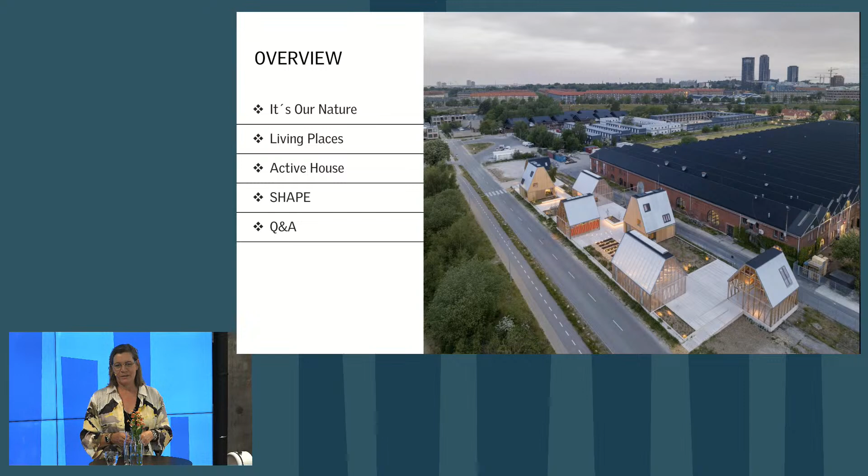The reason for us being three is that I may have studied a postgraduate master's, I may be an architect, but I still don't have a real scientific degree. So I think it would be a bit fake to call it a science talk with me only. The real scientists are Seda and Nicole, who are doing a Ph.D. and respectively a postdoc on these aspects of sustainable buildings, which is incredibly important.

So very briefly on Velux Group and our sustainability strategy, which is from 2020, called It's Our Nature. It actually founds back to 1965, when our founder, Villum Kann Rasmussen, formulated this purpose for the Velux Group, which covers the social, environmental, and economical aspects. Back to 1965 - had we written it today, I don't think we would have changed it. Maybe we would have written 'sustainable' into the wording.

This is our guiding purpose as a group in the building industry. Also, as you know better than any, our world needs it. We have to take action in this decade. This is the decade of action.

So the way we have approached it is on 3 levels: securing a responsible business with 9 targets, innovating products - obviously that's what we deliver, produce and sell, that is expected from us - and then the pioneer targets. And that's what's important today.

The 3 pioneer targets are: one is the historical footprint of the company, then it is the footprint of the products, halving over 10 years. And then what I'm going to talk about today is showing how to build sustainably, because it's not just about the company, it's not just about the products, but it is, so to say, the scope 3 - what do we do with the buildings where our products fit in?

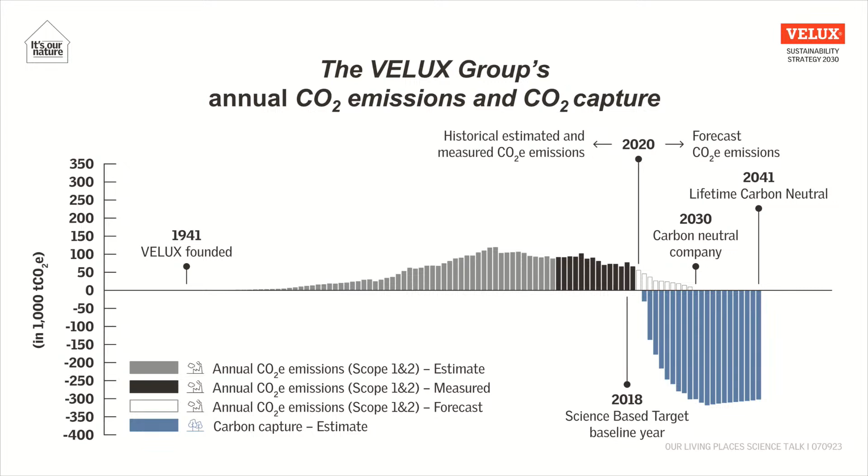And there's a lot of interesting talk we could have around that. I would just like to emphasize that in our perspective, it's not only about what we do from now on onwards, it's also about what we have done in the past. We cannot ignore who we have been in the past. And this is our focus here.

Then there is the carbon footprint of the products that we produce, and that is by far the biggest part of the CO2 in scope 3. Talking about scope 3, this is scope 1 and 2, these are 6%. So 94% is not in a Velux factory or something that we can decide over, because it's about steel and glass, aluminium, and that is some heavy stuff that we then have to work in partnership with our suppliers on.

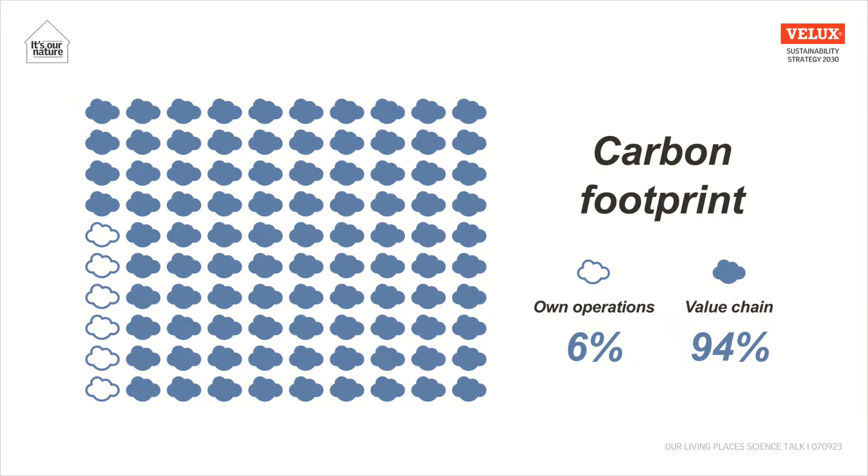And this is by far the biggest task, I think we can say that for sure. It's giving us some headaches, but we are on a good path. We can't say that we're there yet, but we're on a good path for 2030.

The buildings show how to build sustainably. We have actually been working with demonstration buildings for 20 years, more than 20 years, doing renovation and new builds - more than 30 projects in over 22 countries.

So what I'm presenting today stands on the shoulders of what we have done in the past, and that is what the company has done - many good colleagues, architects, engineers, other colleagues who have worked to push the agenda for sustainable buildings. And why is that important?

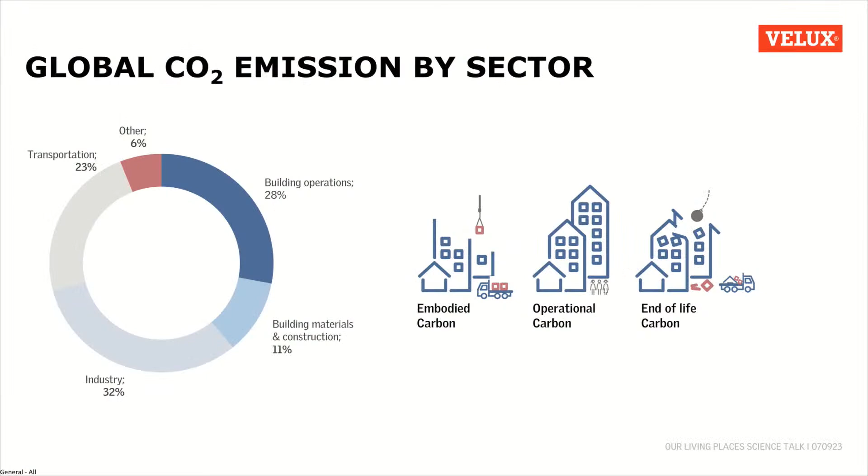Well, I think you all know that CO2 emissions in this sector account for more than one-third of energy consumption and CO2. So what is it we do? Well, we might first of all take on the lead. That's one thing. The second is you can play a role as a catalyst for impact and for change, and that is the role we're trying to take. We can't do it alone, but we can get the idea started.

And that's what we decided four years ago, when we decided to look at this framework, because it's important to say it's not just about the buildings. We cannot only talk about the four walls. We have to talk about urban development, and what is it we leave behind, or what is it we shouldn't leave behind.

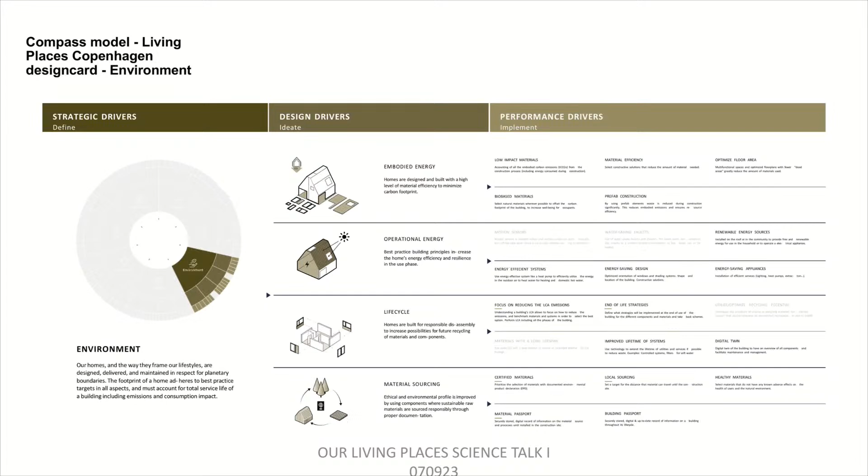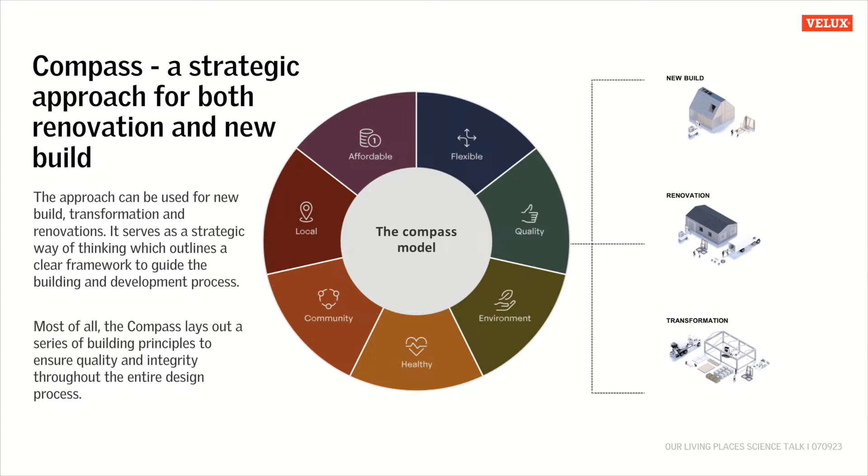So to do that, we have to look at it from a framework perspective. I won't go into depth, just to mention that we've worked with this in a framework we call a compass, which is able to score different parameters - I think it's a very known perspective. Because if we can't measure it, we can't manage it. We've worked with all kinds of typologies and aspects throughout health and energy. That's what we call the compass model, which can be applied for new build, renovation, and transformation.

And that's actually a continuation of our work since 2011 with Active House, which is our approach. We can discuss certification systems and all these good initiatives, but we have a fundamental conviction that you have to evaluate buildings by their environmental footprint, their energy consumption, but above all, the impact it has on humans. I can see Søren from Climate in the room, not surprisingly nodding.

This is what matters to us as people, because if buildings are not built for people, then what does it matter? When I explain it to lay people, it's very simple: it's your eyes, your skin, your lungs, your ears. Does that matter in the buildings we're in? Yes, it does, and we can quantify it - that's what we've done with this radar. Nicole will come back to how we've quantified that.

So this is the initiative - we call it Build for Life, and it's the whole life perspective, the life cycle analysis that we have to look at. We're doing a lighthouse project in Østbirk in Jutland, which is a transformation of old wooden barns into an innovation house, and they're already doing the construction. Worth a presentation on its own.

Today I'll talk to you about living places, how we've concretized this concept for homes. This basically supports the purpose we have today. I showed you the one with our founder, the pipe, but today it's what we see ourselves in: we create well-being for people and planet, transforming spaces, using daylight and fresh air. That's what we're able to provide.

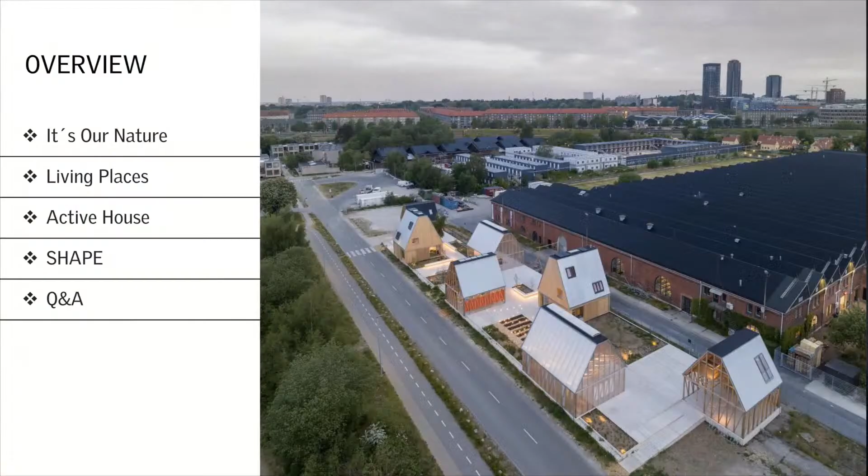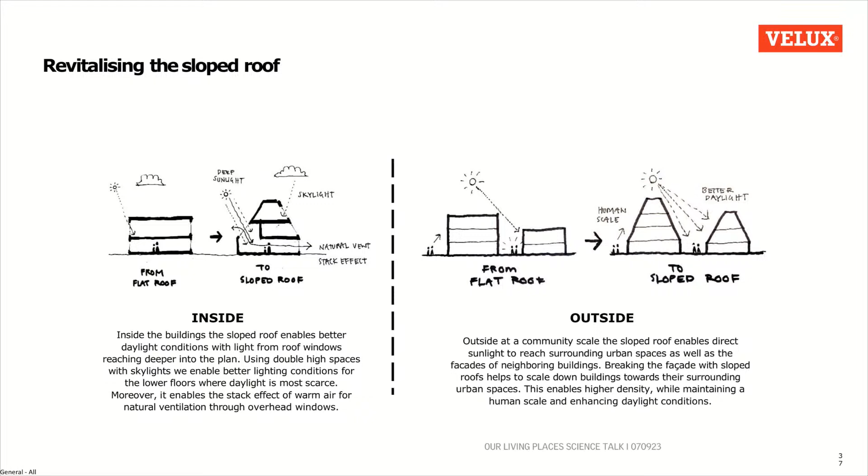And that brings me to talking about living places, which also takes its starting point with the sloped roof, which has, we think, advantages both from the outside and from inside. We think it would be nice to bring some sloped roof back into housing - maybe it doesn't all have to look like the same square shape, the tendency today.

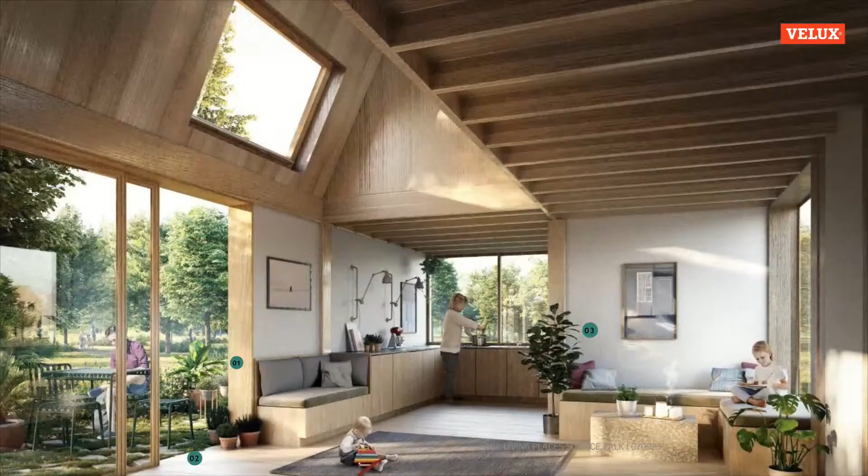We developed this together with EFFEKT Architects and MOE, now Artelia engineers, in a very close partnership - important to underline. That's basically our nature, and this is one of the first visuals before we built it, trying to take the outside in, trying to make a more open envelope and to be more in contact with the outdoors.

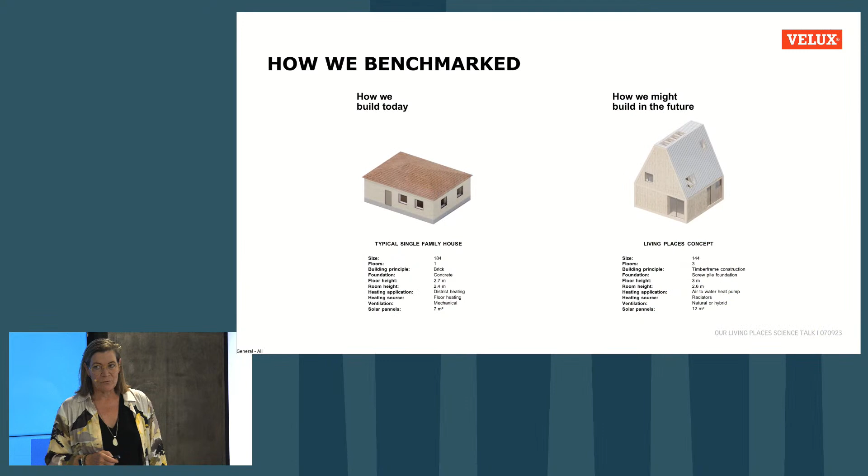Yes, and then we did one thing more: we benchmarked it towards what is a typical Danish single-family house. Because in our work with demonstration buildings, my colleagues and I have often experienced coming to other colleagues who are not building professionals and saying, we've made this fantastic home, look at the performance, hear about the U-value and transmission factors, and they're like, huh? What does that mean? I can't relate to it. We have to make it more tactile. So we took the standard Danish single-family house that Artelia has data on, and kept asking, what do we do that is different?

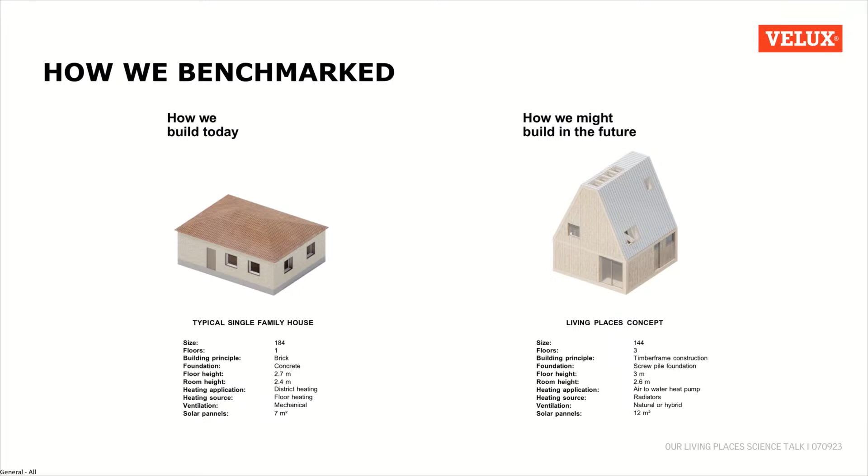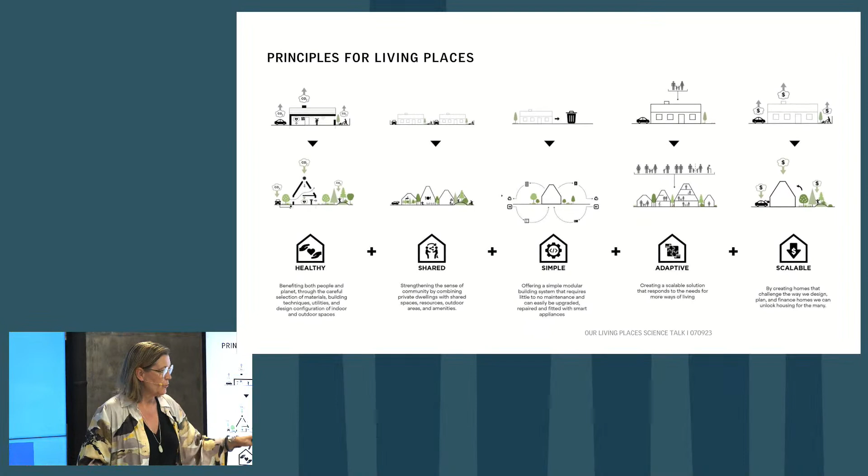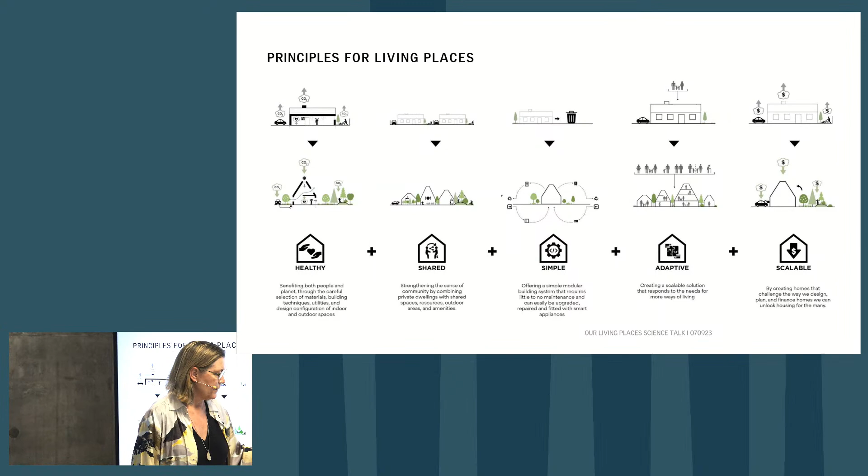You can go through the data on the one and the other, but I'd like to come to the principles, because that is the carrying base in the concept: we take all these principles into consideration when we try to build more healthy for people and planet, to share more, to not have all the same functions in one house, to make it simpler, because we keep complexifying buildings, to make it adaptive to fit different life patterns, and above all to scale it. This is a key principle, because you can always build something nice once, maybe twice, but we would like to scale and influence the entire housing building industry.

That's also why we build new build, because we know transformation is the biggest challenge, but new build is what shapes the legislation, the trends, and the first movers and pioneers. Those are the ones we would like to work with and reach.

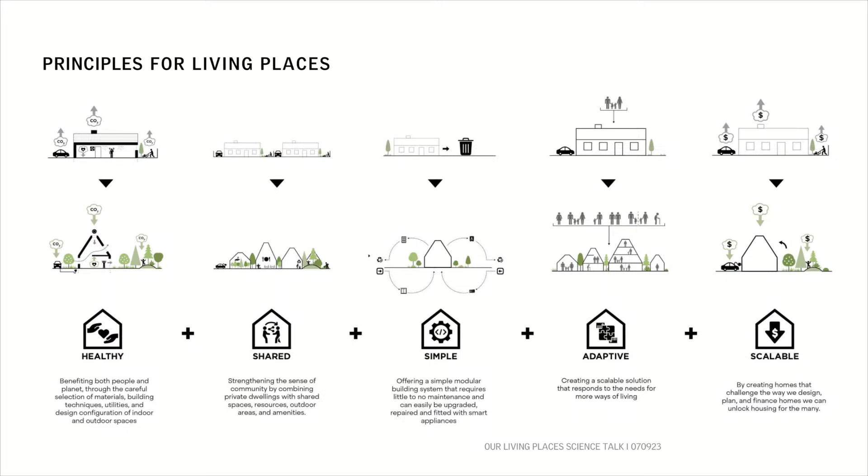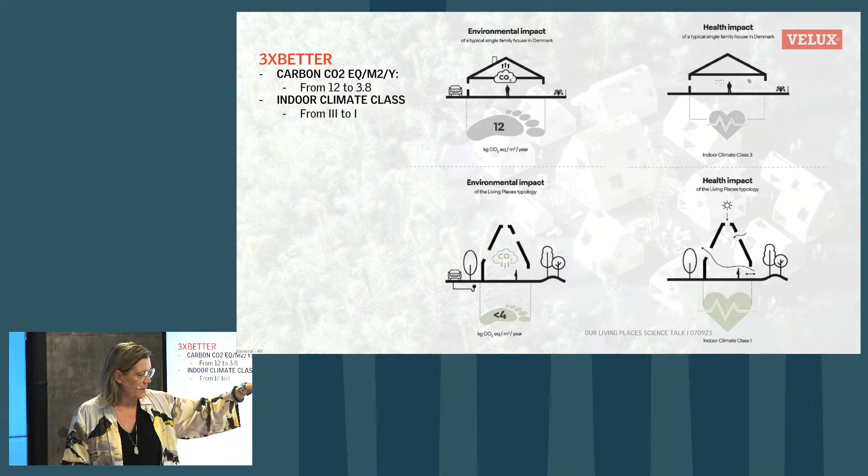I will only go into the healthy part. This is where we have managed to go from the legislation benchmark house of 12, from before we had decimals, to now verified at 3.8. So that is 3 times better, and the indoor climate is 3 times better.

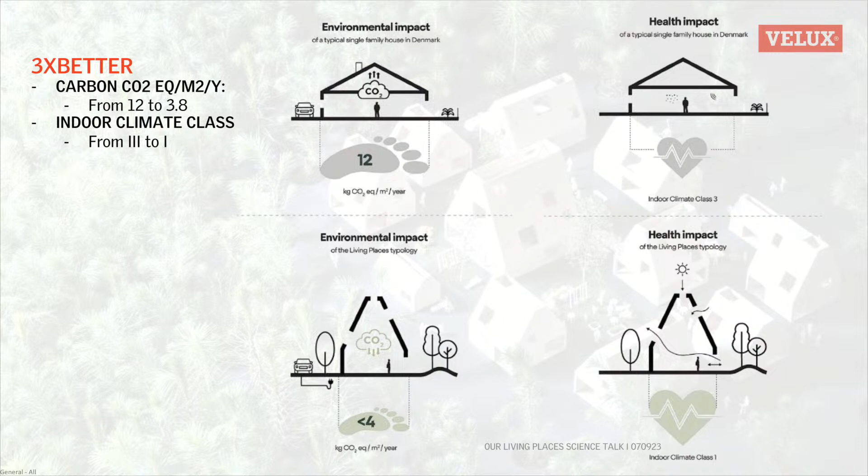Why is that so bad in a single family house? The climate experts in the room have a lot of data on that. The basic thing is that the secondary rooms, which are actually the primary rooms - the kids' room and the bedroom - are not regarded when it comes to indoor climate. It's always the nice big rooms with the facade and panorama windows, but the secondary rooms are where we spend the most time. So that is the most decisive for how good we feel the next day, our ability to learn, perform, and so on.

These slides are mainly for information, but this is the benchmark house put on the life cycle, the full life cycle approach, which now corresponds to the Danish legislation from 1st of January 2023.

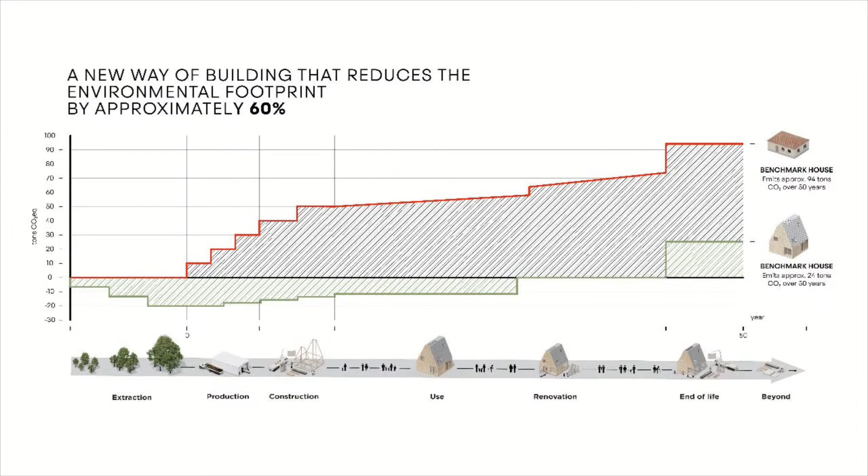This is our verification, which is important. It's not just something we say or our engineers say - it is actually verified by a third party.

This is how we try to explain life cycle analysis to our visitors and target groups, because life cycle analysis is something very complicated. I'm fully aware there are a lot of decimals, and there has to be. But on the other hand, the weather forecast is also very complicated, with a lot of algorithms I don't understand, but I can still read a weather forecast.

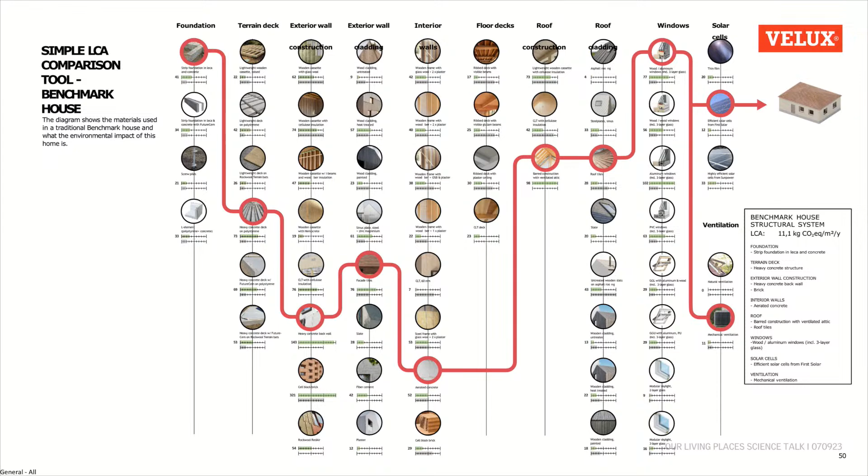And the same with life cycle analysis - you can go and look at the different shelves where you pick the stuff to build your homes. If you're renovating your house on the weekend, there will be shelves in the DIY store where you can pick these elements to build from. What will decide the CO2 footprint? It is what you take off the shelf. This is what they took off the shelf when building the benchmark house - this is what they chose, saying we like to build with these types of materials.

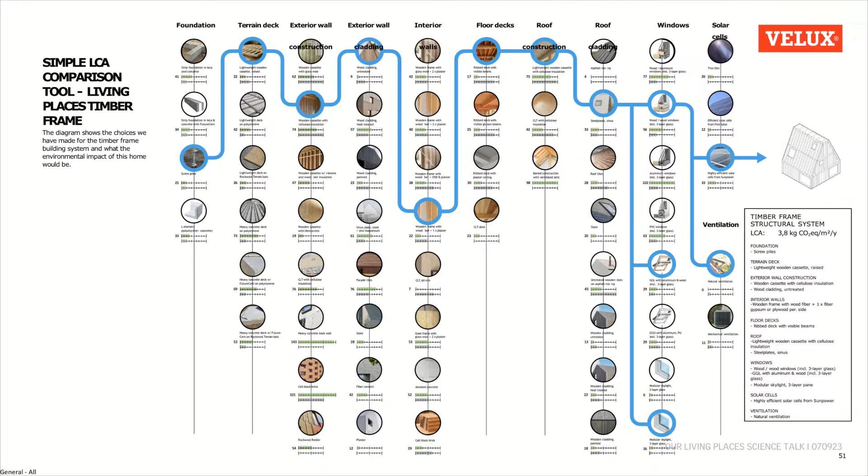And this is what we use to build the timber frame home. So the difference is from 11.1 to 3.8. It's simply a matter of taking it down from the shelf, looking at it just like you do when you buy food, then assessing quality and price and so on.

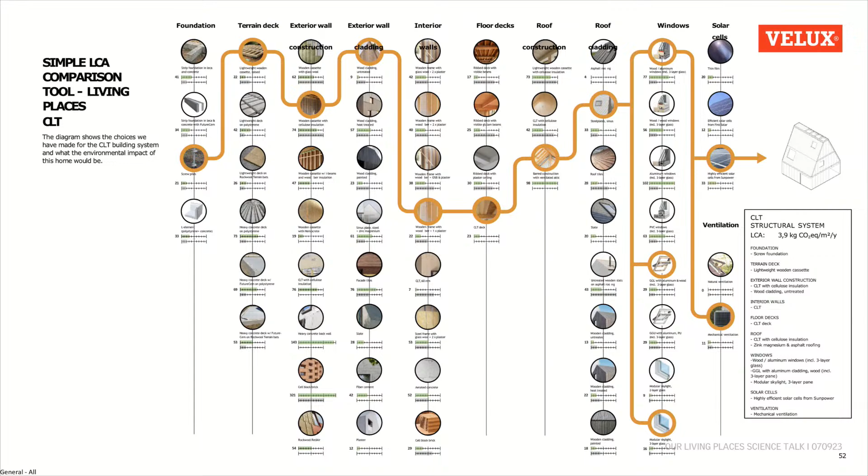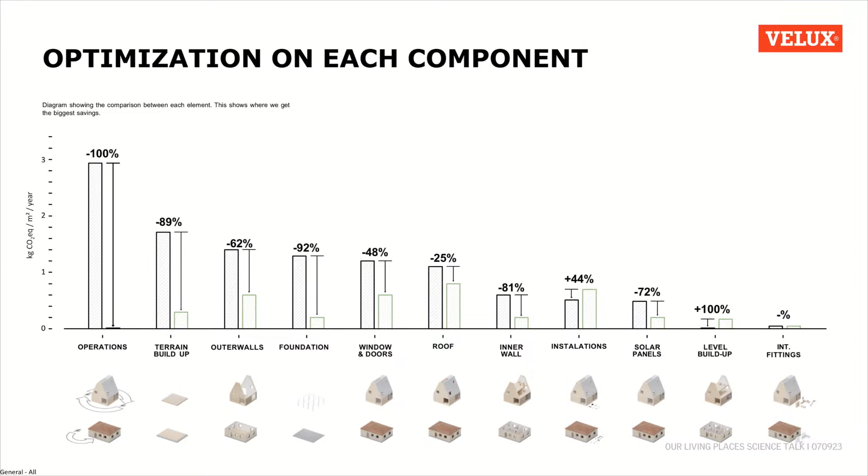And this is the CLT. We have made two structures so we don't have to discuss the structure, because that's not material to debate - exactly which structure. And for the nerds, or even semi-nerds like myself, these are the facts. They are incomplete, obviously, but we have done all the calculations as if they were complete, and more. These are the main savings.

What is different? Same again. And these are the preconditions for those who would really like to know what's inside.

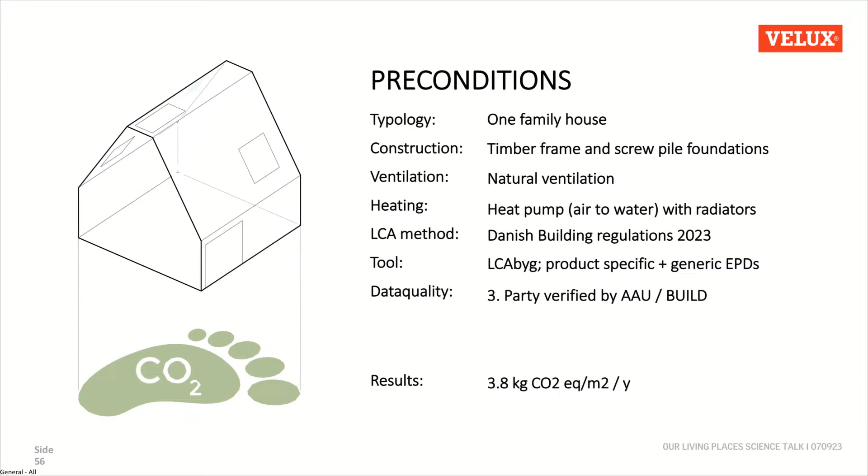The people part, the senses, is just as important, because of course we could build a nice home with no windows - we would never do that for good reasons. But we also think nobody should be deprived of access to daylight and fresh air.

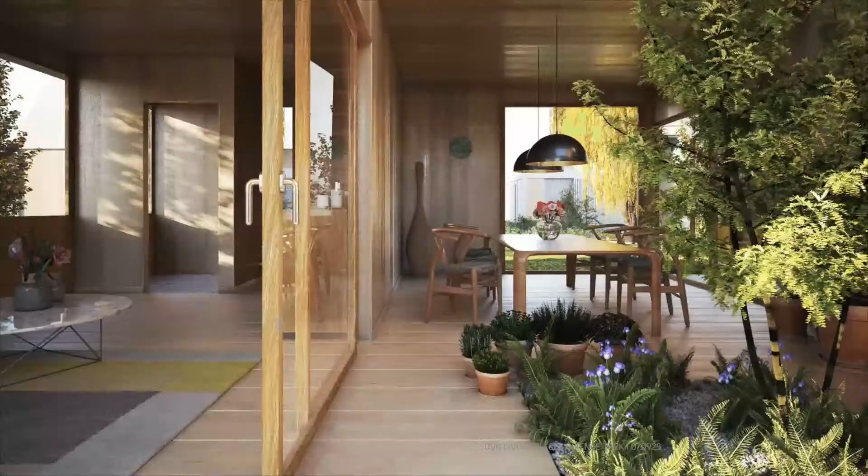So this is the approach, and we are here because of the UIA 2023, and we are partners for that, and we chose Copenhagen as the launch platform because of the Copenhagen capital.

So this is why we have built it as a living lab, in order to showcase it, because once you can build it, you can discuss it better and learn from it. That is the purpose of it.

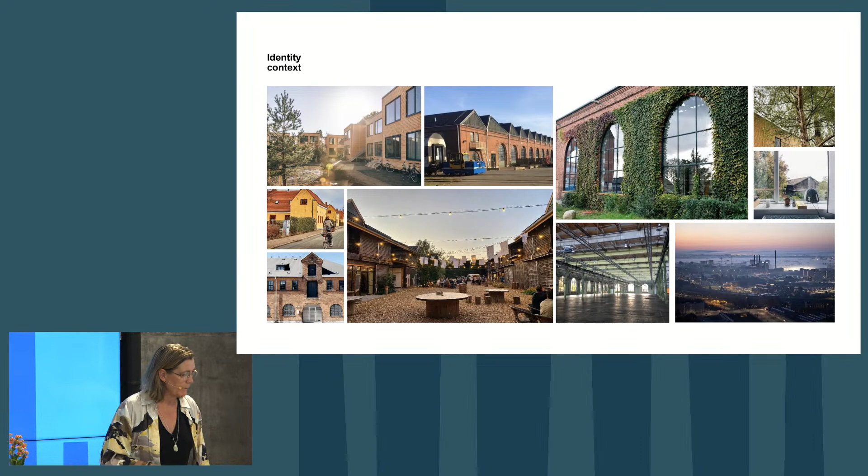And we chose Jernbanebyen, the old freight train area in Copenhagen, which has some very interesting student housing, some quite nice old buildings, and is fairly central in Copenhagen.

It's placed out here next to the tracks and between some main roads, but still 3 kilometers from the main station. We've built it up as a village because we can no longer only talk about the 4 walls. It's so important you also remember Corona. You all of a sudden realize very much where are you living, what is immediately outside, who are your neighbors, do you even know them, do you know their name, could you go and help them, or vice versa. So this notion of community was very important.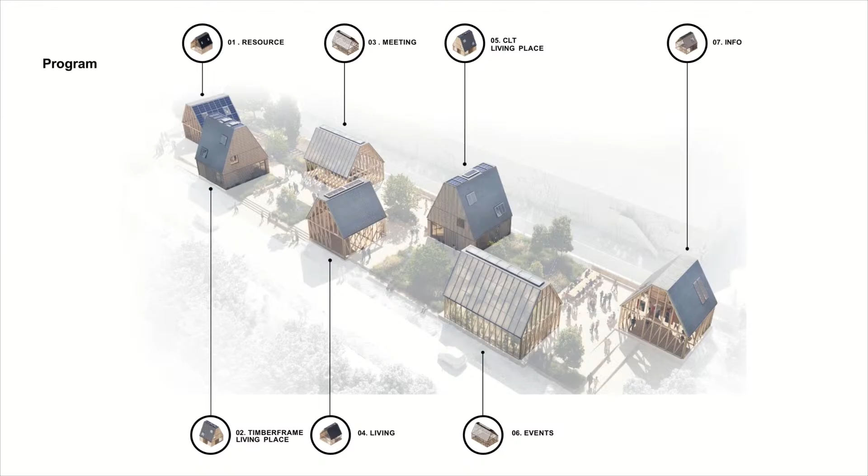That's why we built it up as a village, and we built 2 single-family homes. One is the CLT, and the other is the timber frame. And then we have exhibitions and events. This is from the visualization to the finished result. We opened in April.

Now the greens are growing. I've actually just been there, and we have a vegetable garden also. That's also a very important part of where you live, which is self-sufficient by 80 square meters, done by Fælleshaven.

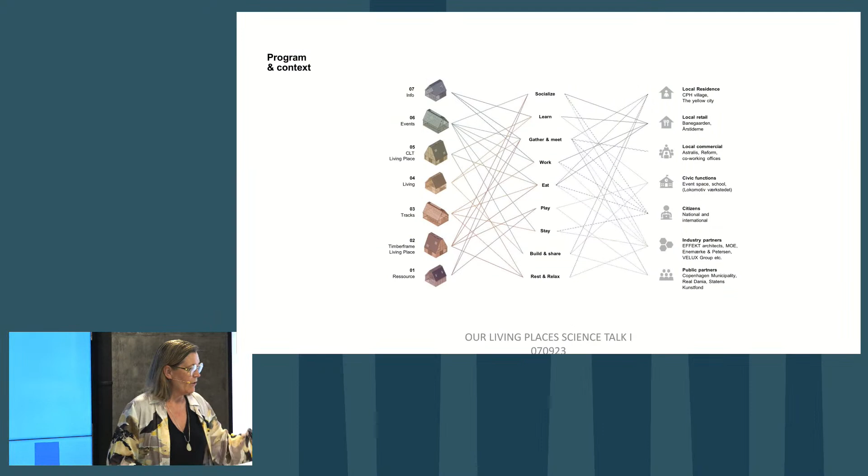We have a lot of interactions with the different functions in the pavilions, and then with a lot of professionals like yourself coming there, having a look and discussing. We have welcomed more than 5,000 people since we opened over 2 months, and still more coming, and we have actually decided to let it stay until September 24, because lots of people would still like to come and see it.

And coming back to the compass, before I hand over to Nicole, this is how we score it, but it's also about the one planet, and what is it that we are not leaving behind. So we took a motive from the planet, finding stones. Margrethe Odgaard has done this, finding stones and pigments from the planet that has guided us to the colors of the interior system.

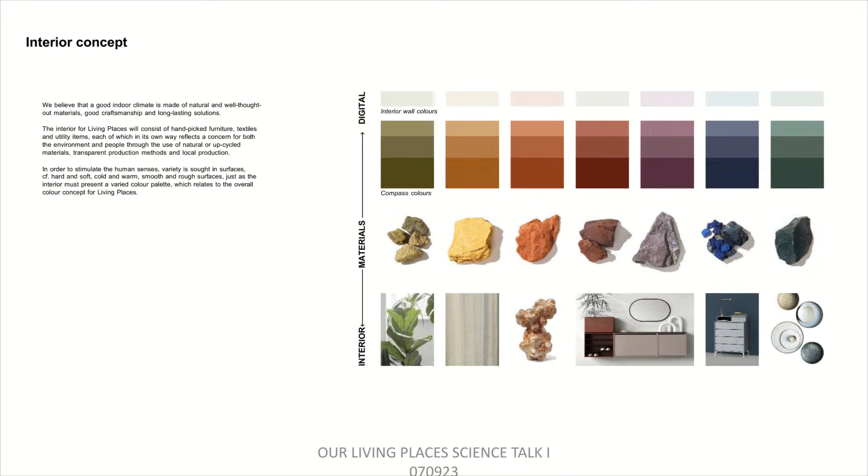And these are the stones giving this color scheme, and that is what you will see. If you have not yet seen, please stop by and look at the houses, because this is what matters most, is if you feel connected. It's difficult to express what it is, but it's that feeling of being home, identity, belonging, feeling safe and secure. It's not about necessarily a 213 square meter home. It's not about the bricks. That's not what you're looking forward to when you're coming home.

So just a brief look inside. We have made a virtual tour, and actually next week we will be releasing a film, which is a documentary that is also showing you the homes in greater detail. But still, I encourage you to stop by and come and have a look. I think the next open house is the 18th of September, but we have a website, and there's a link where you can come in and have a look.

Here I'm showing the CLT, so the solid wood house, so to say, and then compared to the timber frame house, where you come up on the first floor, and you have the 2 rooms, identical. They have a bit of different orientations, and a bit of different fenestration. And then you go upstairs, up the nice wooden staircase, and you come up to what I like to say is the best room, the bedroom, which is the top floor.

So it's a 147 square meter home, but we have also developed it as a row house, where the CO2 footprint can be as low as 2.9. So we're getting close to the 2.5, which is the one planet where we leave nothing behind or don't use too much.

And this is our partners, proud partners, without whom we could never have done it, and we're doing it in great cooperation. So, yes, happy to pass over to Nicole to explain a bit more about the Active House parameters, to go more in depth with that, because she is the mastermind behind that.

Over to you, Nicole. Okay. Hi to everyone. Thank you, Lone, for presenting me.

As has been said before, I'm a third-year PhD candidate at Politecnico di Milano, working on a thesis supervised by Professor Marco Imperadori and co-supervised by Lone Feifer, titled Fsense, Phygital and Cognitive Paradigm for Active Housing Use Rating, estimating via IoT devices the effect on comfort during building operation in a multi-purpose and BIM-based framework. The paradigm consists of 5 points toward achieving the sustainable management of cognitive buildings, to fill the gap between predicted and actual performances by determining and validating them with the multi-criteria evaluation method of the Active House Rating Scheme, to enhance the comprehension of performances and communication between stakeholders, to recalibrate strategies for increasing comfort during building operation, promoting sustainable practices and use of buildings, and digitalizing the built environment toward EU objectives.

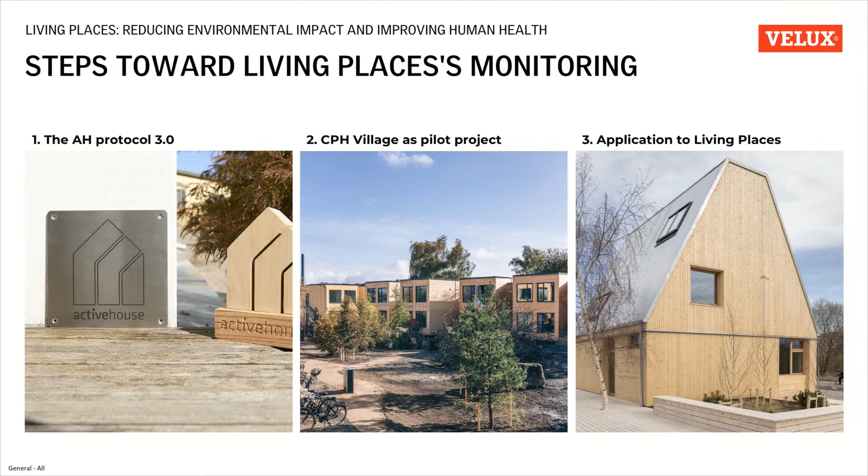Before describing the monitoring of living places, the path includes the Active House Protocol 3.0 description that has been already shown a few minutes ago in the slide by Lone, and the CPH Village pilot project, which supported the validation of the monitoring strategies applied to the living place building.

The Active House rating scheme is recognized internationally as a sustainable building certification, based on three main principles: comfort, energy, and environment. It focuses on 9 criteria: 4 for comfort, 3 for energy, and 2 for environment. To certify an Active House, the building should achieve an average score across all 9 criteria equal to or less than 2.5 for new construction, while for renovation or existing buildings the score should average at least 3.5.

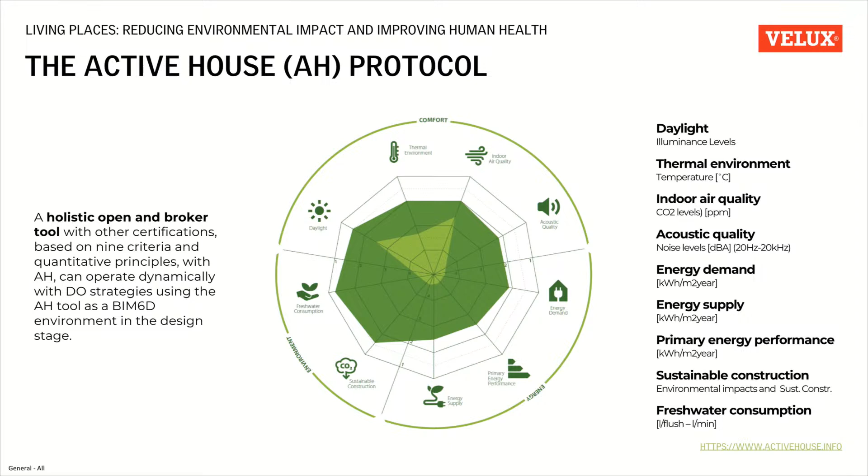What we can say about Active House is that its holistic approach allows for a multi-criteria evaluation to create healthier and more comfortable buildings for occupants without negatively impacting the climate.

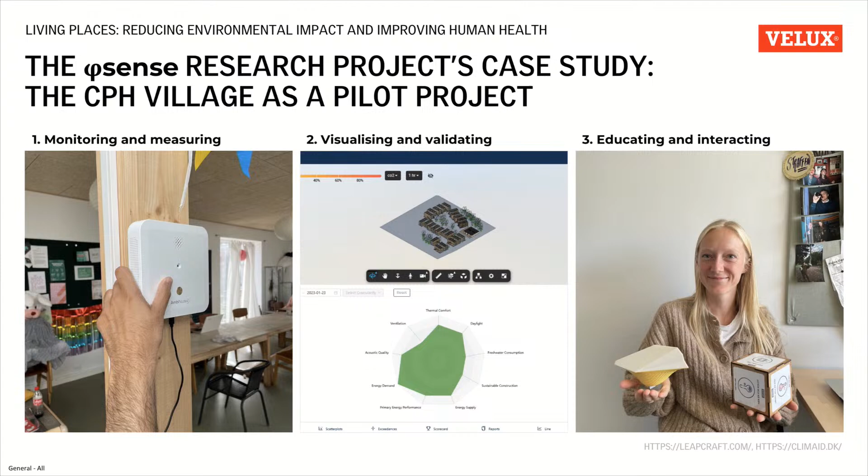The CPH Village case study is a valuable case used to monitor and measure comfort performances of 6 selected spaces occupied by villagers, to visualize and validate comfort performances with the Active House in-use radar, and to educate and interact with users. To perform the monitoring, the AirBird and mini-node by Leapcraft and the feedback cube by Climaid were installed, with the purpose on one side of measuring temperature, relative humidity, and CO2 performances in the occupied spaces and monitoring them with the web app, and on the other side to educate with alerts emitted by the AirBird or mobile notifications given to users when comfort thresholds were not met.

This thus allows users to provide feedback on their perceived comfort by rotating a cube that has different faces describing perceived indoor environment conditions that the user can feel.

Following the CPH Village findings, we saw that the dashboard is a helpful tool to comprehensively understand performance variation and identify occupant habits and building design strategies, as these units did not all have the same orientation. So different perceptions of the environment were recorded through interviews made with the occupants.

The Active House in-use radar of the web app provides a user-friendly interface for simplified data display and shows the benefit of integrating technologies to improve indoor environmental quality. The mobile app and the AirBird alerts serve as helpful reminders for users to take action on the building, for example opening a window or changing the setup of the radiators, which also leads to increased awareness of the environment.

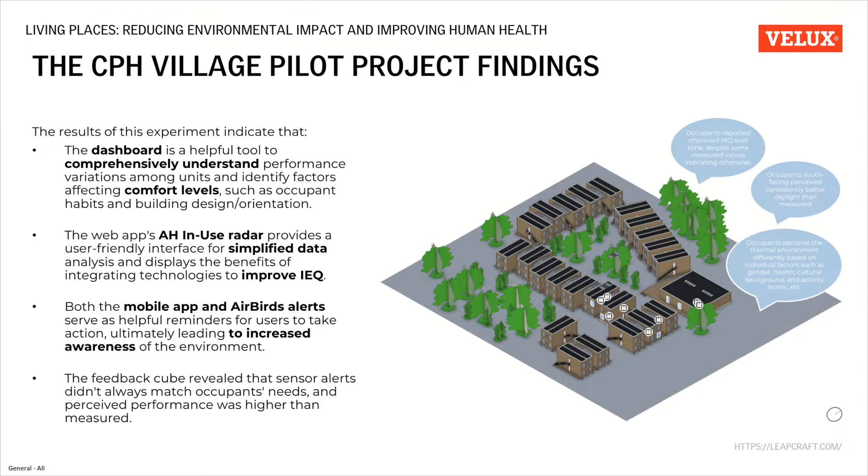Finally, the feedback cube revealed that the sensor alert did not always match occupant needs, and perceived performances were higher than measured. For instance, occupants perceive the thermal environment differently based on individual factors such as gender, health, cultural background, and activity levels.

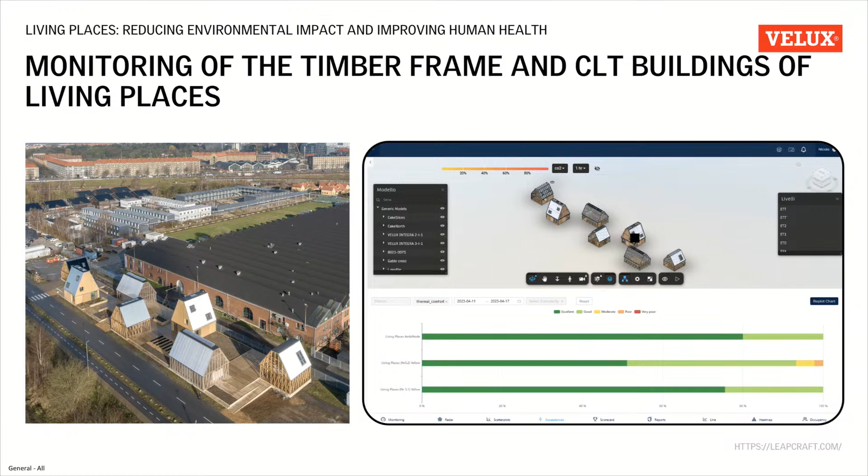According to the pilot project, we finally arrived at the monitoring of living places, to which the same approach has been applied, and devices have been installed on each floor of the two buildings, the CLT and the timber frame one, to monitor performance through the web app and mobile app.

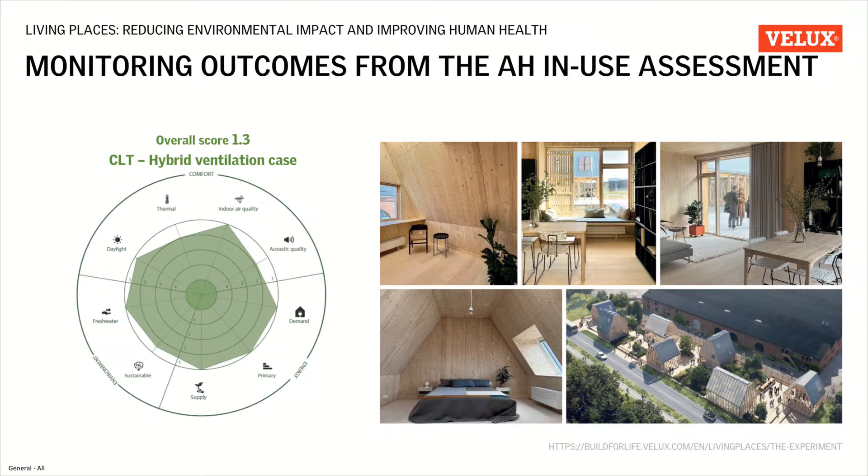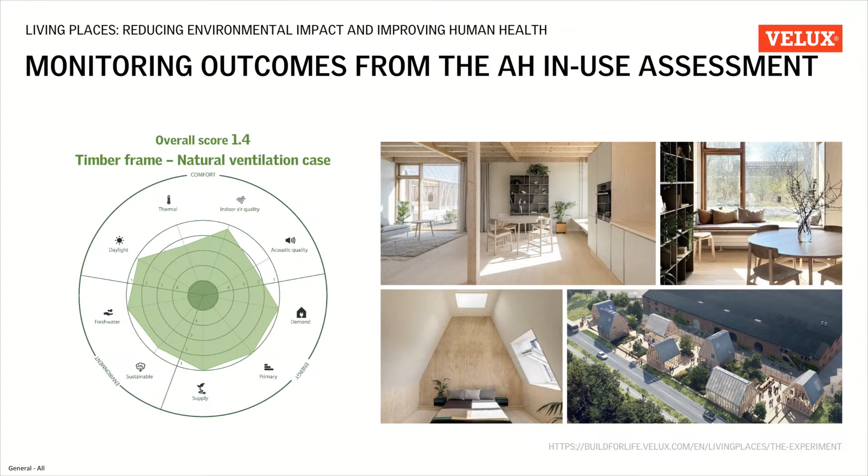After the first monitoring period started in April, the actual comfort performances for the CLT building achieved an overall score of 1.3, while for the timber frame building with natural ventilation we achieved an overall score of 1.4. Through the dashboard, we could see dynamic, live performances for the 4 comfort parameters of Active House.

The first learning, looking at these two radars, relates to the actual indoor air quality performance, which is at the best level according to the Active House Protocol 3.0 compared to simulated data, where lower values expressed in the Active House as an optimum score suggest the indoor space was empty, while higher ones reflect that the building is maybe being visited.

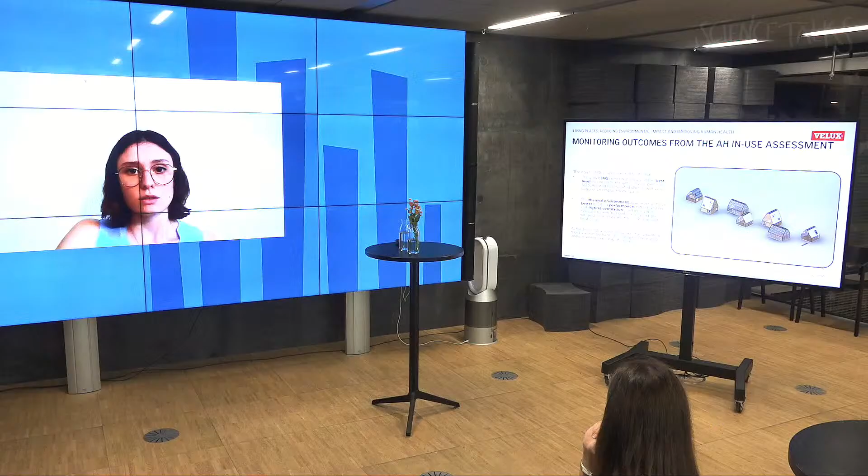According to thermal environment, it appears to achieve better building performance with hybrid ventilation, confirming the predicted performances, while the higher score obtained in the naturally ventilated timber frame building demonstrates there is a free contribution to heat gains. This is also because maybe the building is closed when not visited, contributing to increasing the temperature inside.

Finally, as the buildings are not occupied, it's important to highlight that no feedback was recorded this time, and performance measures were not compared to those monitored. But still, until now, we have really good performance according to comfort parameters, and it's interesting to see what will be measured along this year of monitoring to actually see the overall performances and compare them finally with the simulated performances achieved with the Active House.

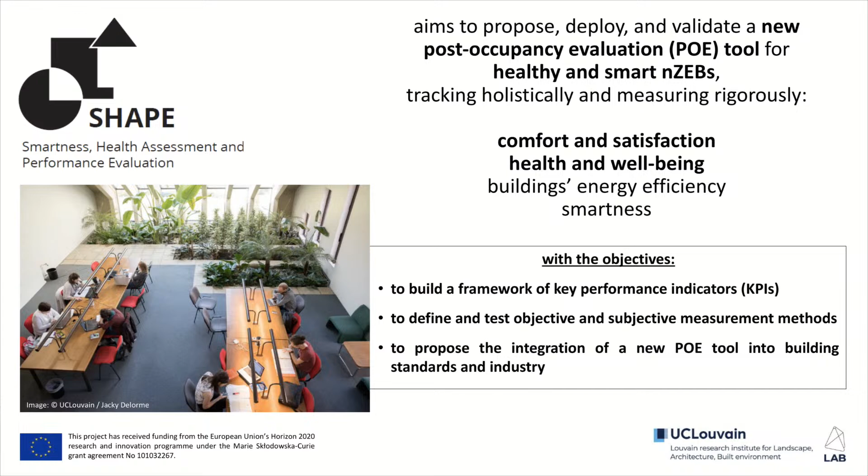When we talk about inhabitant experience, I tried to distinguish in my first slide between comfort, satisfaction, health and well-being. This is through a new conceptual model we developed in collaboration with Dusan Licina from EPFL Switzerland and Paulina Martinez from Chile. In this model, we wanted to distinguish these four human factors, these inhabitant experience measures.

When we say comfort, it's very dynamic—a transient feeling of relief and enjoyment. When we say satisfaction, it's a more high-level cognitive judgment, a subjective appraisal and evaluation at a more complex level. When we say health, it's the absence of disease but a bit more than that—it's a complete state of physical, mental and social well-being, and like comfort, it's transient: healthy or unhealthy right here, right now.

So it's very dynamic. When we say well-being, it's like satisfaction—it has a higher level than health because it comprises resilience, restoration, your connection with society, and contribution to the communities you live in. So it has a higher-level dimension.

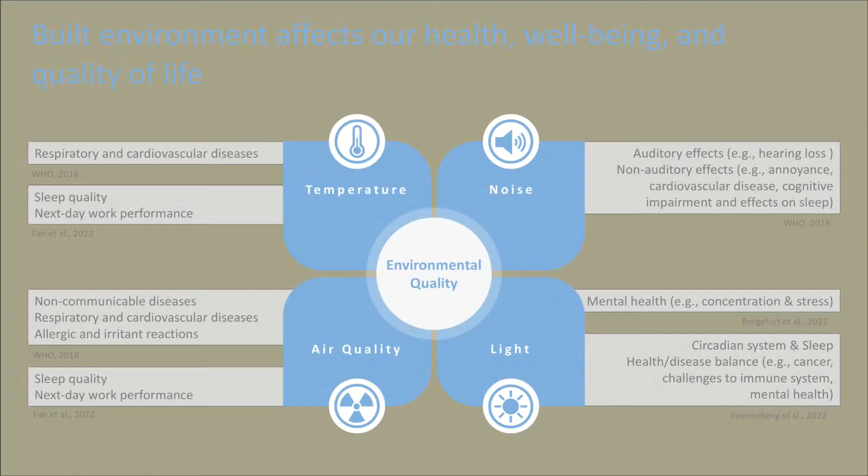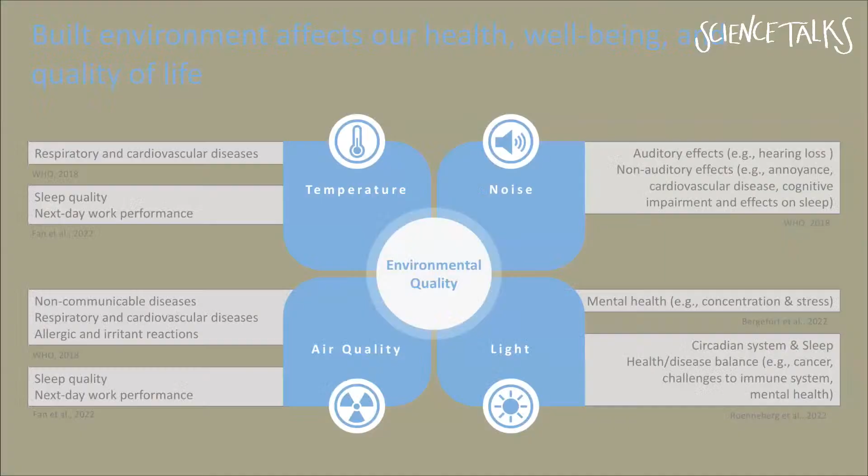Why is this relationship important? Because the built environment affects our health, well-being and quality of life. When we look at environmental quality, both indoors and outdoors, there are four elements: temperature, noise, air quality, and light. From scientific evidence, we know environmental quality is associated with diseases and health outcomes—for example, temperature is associated with some cardiovascular diseases, and air quality is associated with some respiratory diseases, sleep quality, or cognitive function.

I think Science Talks Day is a very nice day to organize this—it's a coincidence that today is the International Day of Clean Air. So when we talk about air quality, or any other environmental quality, it's very important to be knowledgeable about the thresholds that standards and guidelines guide us towards.

For example, in terms of air quality, the WHO's Air Quality Guidelines 2021 provide us the upper limits, the thresholds not to exceed, so that when we are designing buildings, or when we are maintaining and operating buildings, we need to be aware of these design thresholds and ensure them, so that we can provide a healthy indoor and outdoor environment for its users.

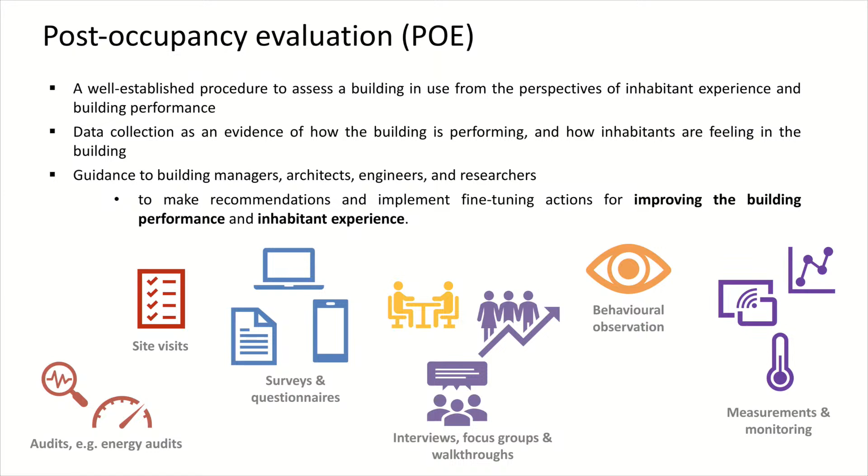And if there are some ongoing current problems, then we do some improvements and fine-tunings so that we can enhance the inhabitant experience of living in these buildings.

In SHAPE, we have done some POE studies. We did the first pilot study in the student village that Lone mentioned, CPH Village, next door to the Living Places. In this project, I closely collaborated with Nicole, so we did the monitoring. Nicole started the monitoring before I was involved, and then I did some questionnaire interviews and a walkthrough study with the occupants. Then, in collaboration with Velux, we did the POE study of the RenovActive House.

It's a refurbished house with an Active House label in Brussels, Belgium. Also continuing the collaboration with Velux, and as we had worked on a student accommodation, when I came back to Louvain-la-Neuve, to my university, in collaboration with UCLouvain, we did the same study in the student accommodations of UCLouvain.

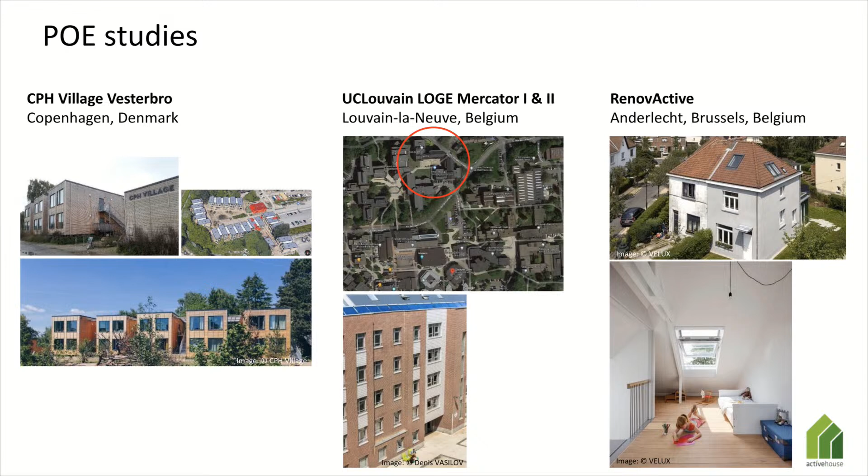Besides these research collaborations with Velux, we also organized an expert workshop. Nicole and myself as researchers, and Lucie Saran and Ambra Goglietti from Velux, organized this workshop at the Healthy Buildings Europe conference this year in Aachen.

In this workshop, we tried to provide participants with both theoretical background and practical examples, like the Compass tool and Living Places that Lone has shared with us. We also provided a design exercise as an interactive workshop.

We provided some challenges like aging population, energy crisis, and climate change, and wanted participants to discuss and provide solutions to overcome these challenges, because this is what we all need to do — academia and industry collaborating together, discussing possible solutions if we want to overcome and solve our current challenges. This collaboration was very important for us.

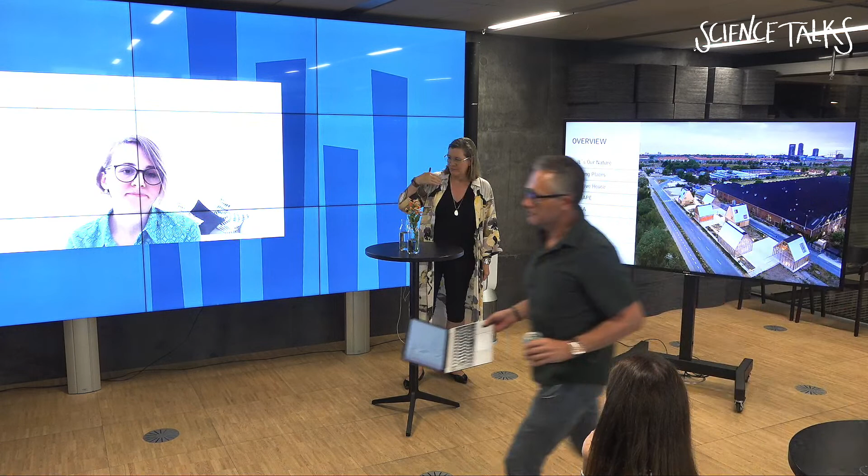With Seda, with your project, there's the aspect of the EU platform where you will be feeding into the work with the smart indicator assessment. Right now the European Buildings Directive next level is in trilogue, and there's a big discussion going on around whether it will be possible to get indoor climate parameters in there, because we can quantify indoor climate. To renovate Europe, which we have to do, we should understand the buildings and how they are functioning today — that is the starting point of any transformation. We have the tools, but they're not yet in the legislation, so we are working hard for that.

So we don't need the Dyson air conditioners like we have two here in Bloxhub right now. Anyway, we are out for the Q&A. Over to you, Julia.